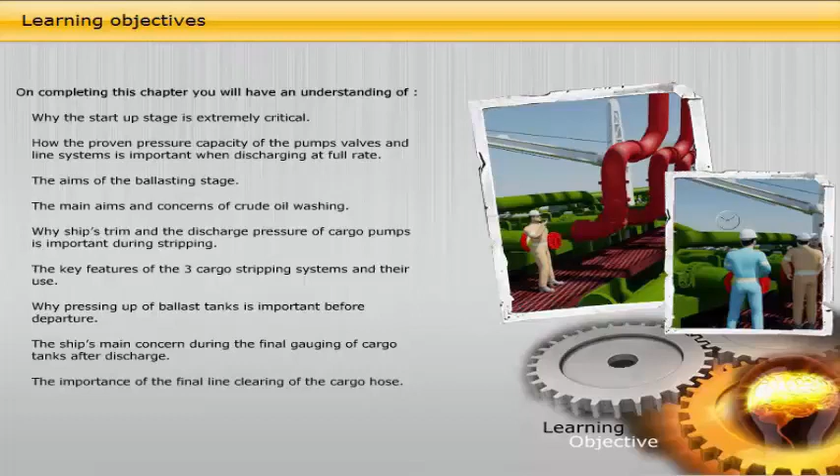why ship's trim and the discharge pressure of cargo pumps is important during stripping, the key features of the 3 cargo stripping systems and their use, why pressing up of ballast tanks is important before departure, the ship's main concern during the final gauging of cargo tanks after discharge, and the importance of the final line clearing of the cargo hose.

In the startup phase of the discharge operations, what extremely critical measures ensure that the tank's atmosphere does not go into negative pressure and that any leaks into dry pipes and valves are quickly detected? The discharge operation normally commences according to the following procedure. Formalities with port authorities and terminal, loading master, completed.

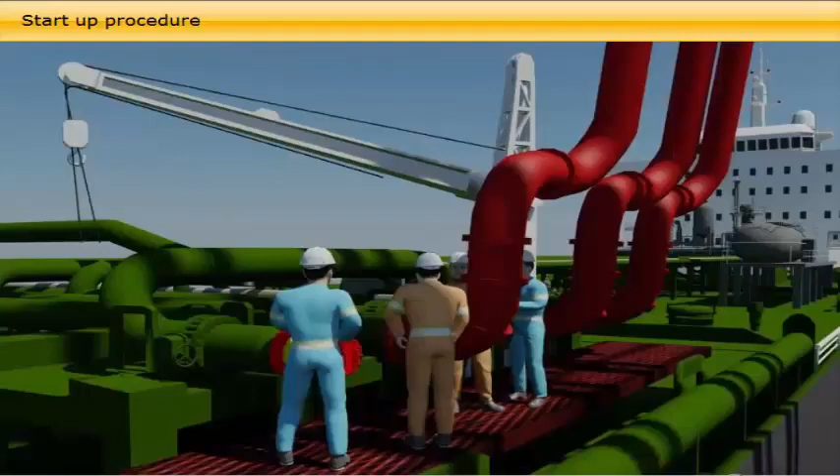Cargo hoses, arms, well connected. Cargo surveyors completed tank survey and calculation of the cargo arrival figures. Lining up of lines, valves and pumps to be used, both onshore and on board, under the supervision of the chief officer and loading master.

Line up and start inert gas plant, with the recirculation valve returning gas to the funnel until the pumps start running. When lining up is completed, and it is confirmed the inert gas plant is running satisfactorily, the chief officer reports to the loading master that the vessel is ready to start pumping.

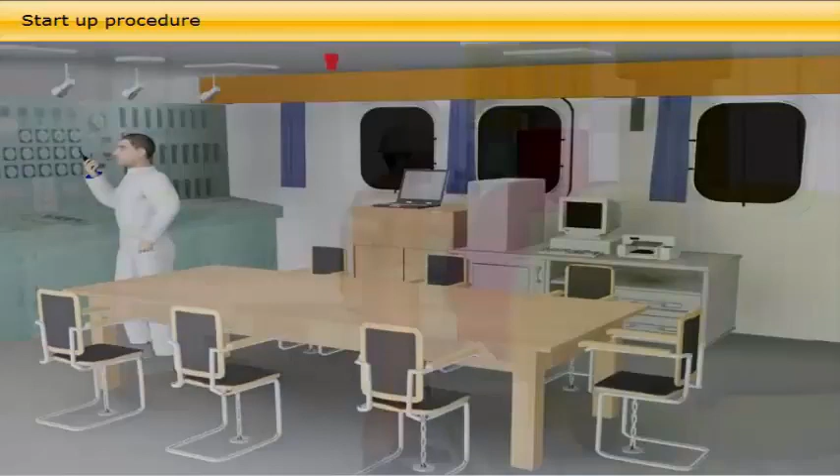The loading master orders the vessel's manifold valves to be opened according to the agreed discharge plan. When the manifold valves are confirmed open, the loading master orders discharge to commence at slow rate for line displacement. The cargo pump or pumps are now being started, either by the chief officer, pumpman or duty deck officer, in close cooperation with the duty engineer in the engine control room, at slow rate until correct flow is confirmed.

When the cargo pump or pumps are running, the inert gas is opened to the deck lines. The duty deck officer, pumpman and boatswain with deck crew must, during this sequence, check that the cargo oil is passing through the manifolds and check valves and lines in use to ensure that no malfunction or leaks occur when the cargo oil enters.

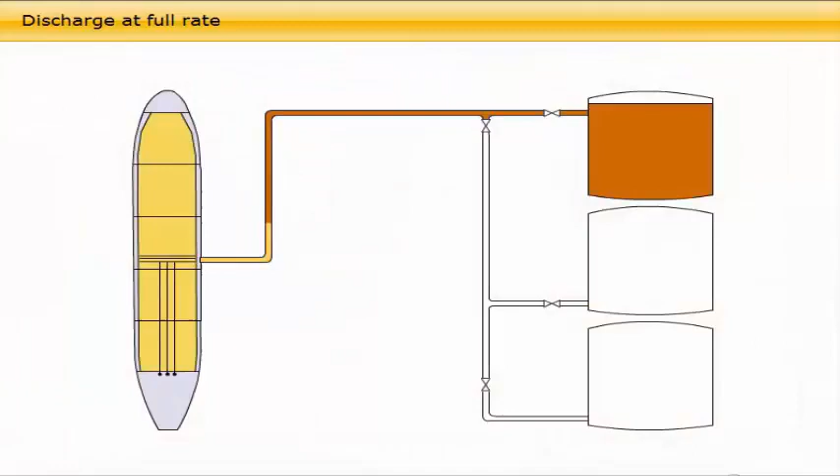Once all lines and valve settings have been proved to be free of leaks and the discharge operations have stabilized at a low rate, what is the main risk when pump revolutions are raised to the full discharge rate? When the loading master confirms that the oil flow is as planned and that the line displacement is completed, he instructs the vessel to slowly increase the discharge rate to the maximum as agreed upon in the discharge plan.

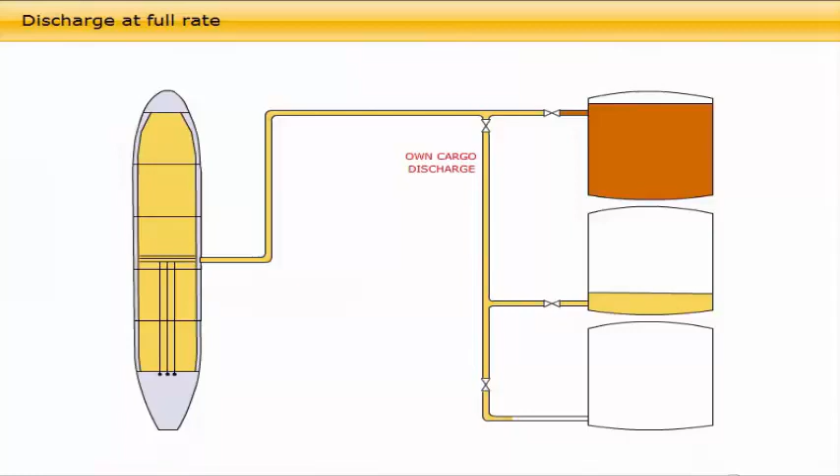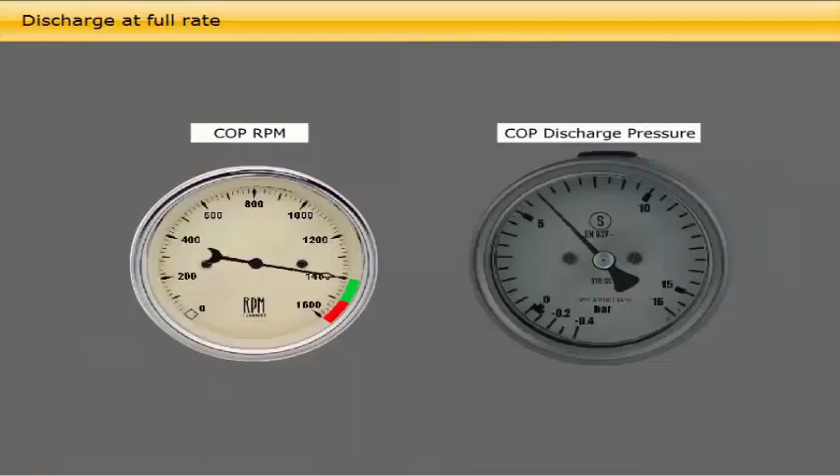In order to utilize the cargo pumps' capacity and operate them correctly, either in series or in parallel, it is important to understand the pumps' characteristics and know the shore lines and reception facility. At this stage, as the discharge has reached the maximum agreed capacity, it is important to check the pumps and cargo lines in order to discover any leaks caused by damaged flange gaskets or pipes holed due to corrosion or pitting. For further information on operation of cargo pumps, see CBT number 0078.

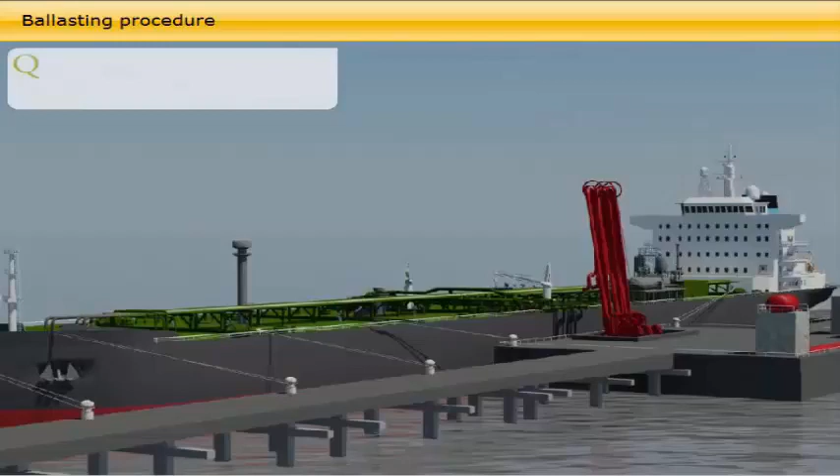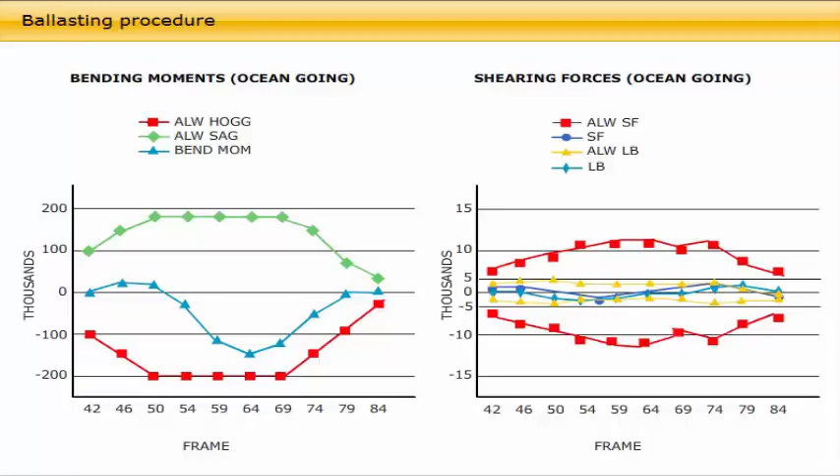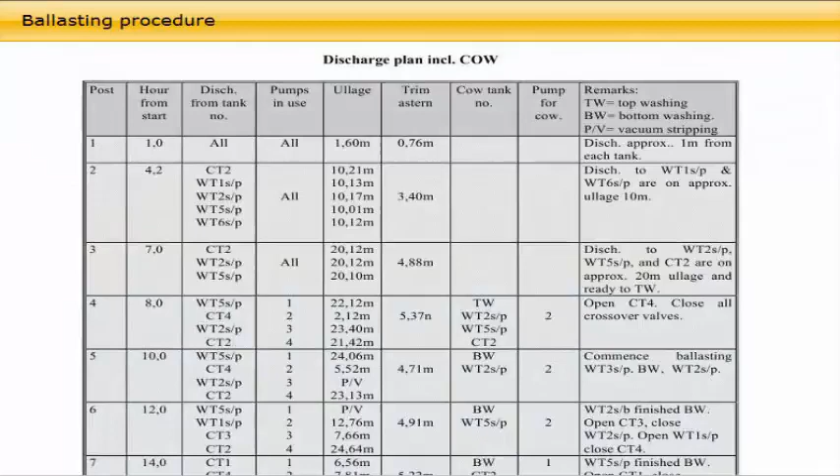What are the 4 main aims of taking in water ballast considered in the discharge plan, which decide when to start taking in ballast during discharging? When to start taking on ballast depends on the discharge rate, hull stress, air draft or freeboard or limitations on fixed discharge arms on the terminal, trim requirements for stripping, and also often a terminal requirement that the vessel may leave the berth immediately in an emergency. This was considered in the ship-shore meeting and will be found in the discharge plan.

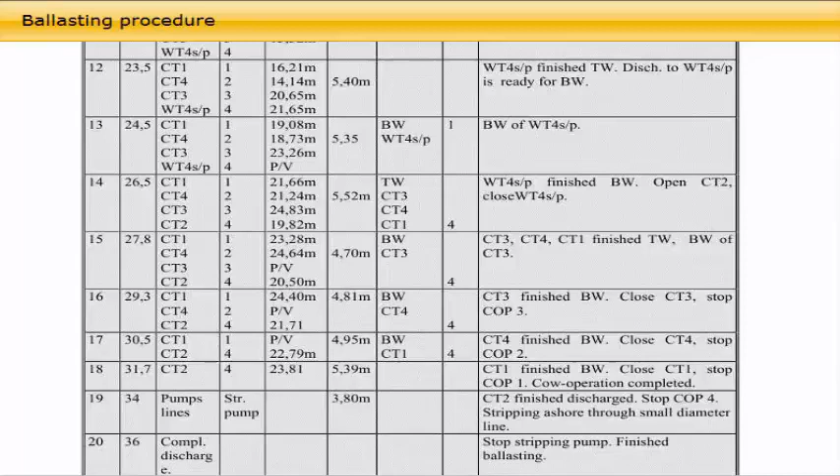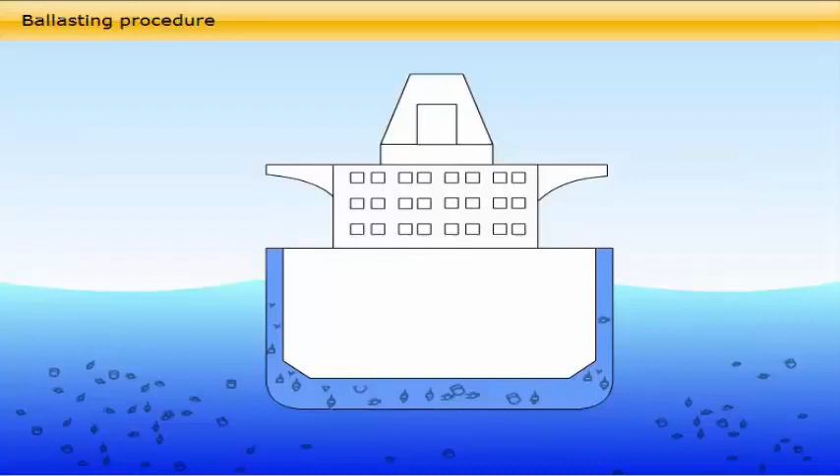In order to save fuel cost, taking on ballast by gravity in the first few hours of the ballasting operation may be considered. Ballast in the double-hull ballast tanks is completely segregated from the cargo tanks and piping, and is therefore ideal for adjusting the trim in connection with crude oil washing and final stripping of cargo tanks. All ballast handling is required to be recorded in the vessel's Ballast Water Management Plan, according to IMO Resolution A868-20 Convention adopted February 2004.

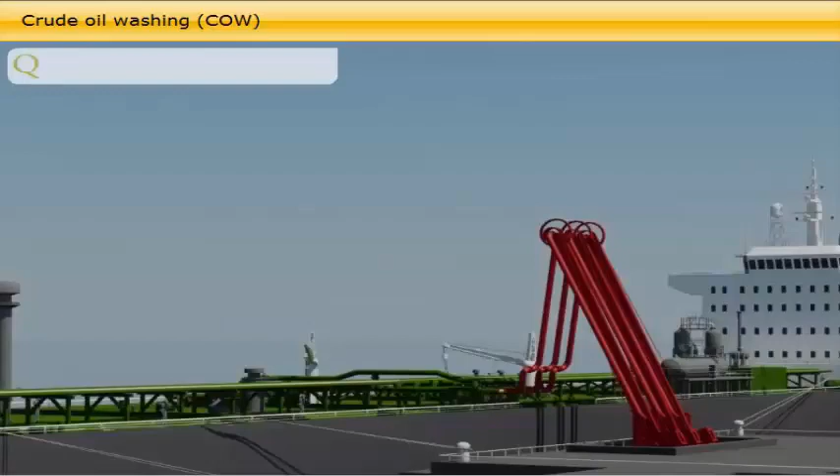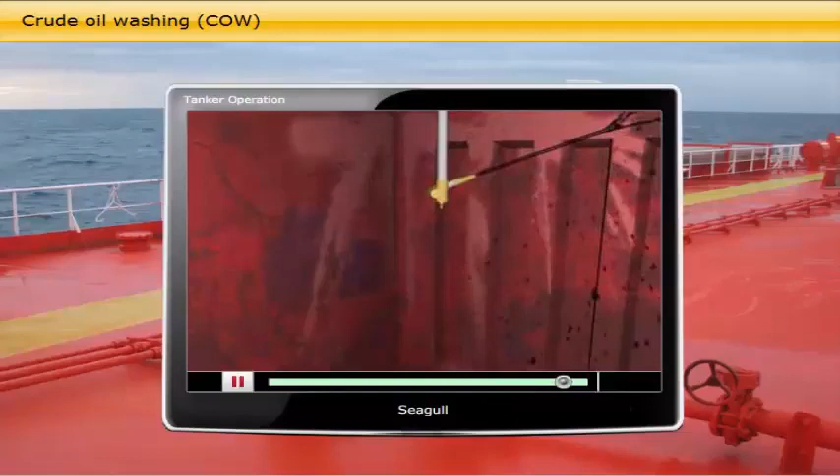What are the 6 main aims and concerns in a crude oil washing operation? The crude oil washing operation is a demanding task that requires full attention from all duty deck personnel. The terminal requires to be informed when crude oil washing starts and to be updated during the operation and when completed. Before departure on a ballast voyage, after the complete discharge of cargo, sufficient tanks shall have been crude oil washed in accordance with the procedures specified in the Crude Oil Washing Operations and Equipment Manual.

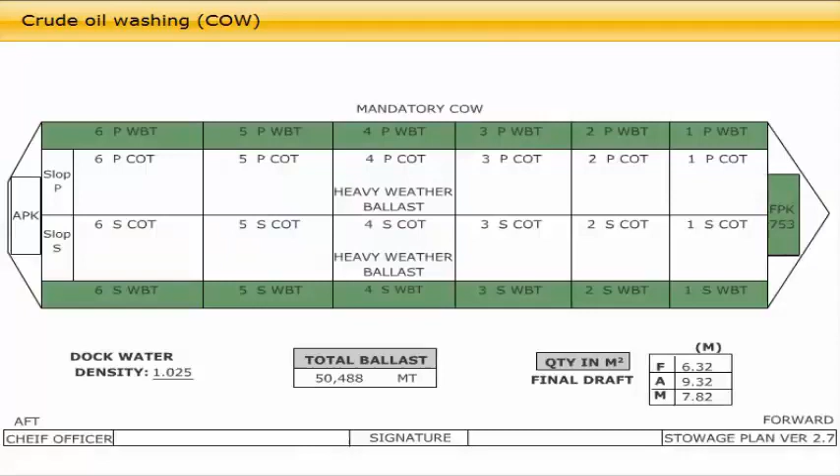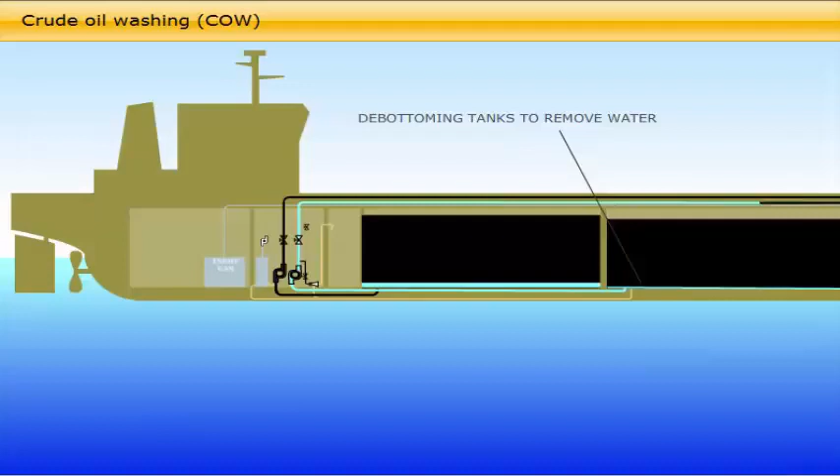Designated heavy weather ballast tank, cleaned to take on ballast in bad weather. For the new double-hull tankers, the required number of tanks to be crude oil washed every discharge is approximately 1/4 of the total number of tanks, including the tanks which are dedicated to take on heavy weather ballast. The remaining tanks are to be crude oil washed on a rotation basis. Sludge control routines. For sludge control purposes, no tank needs to be crude oil washed more than once in every 4 months. Static electricity.

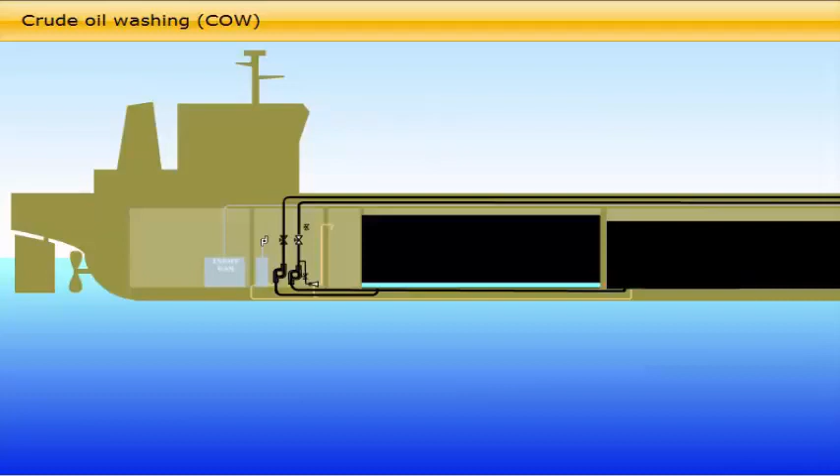To avoid excessive electrostatic generation in the washing process due to the presence of water in the crude oil washing fluid, the contents of any tank to be used as a source of crude oil washing fluid must first be discharged by at least 1 meter before being so used. Any tank used as a slop tank on the previous ballast voyage shall be completely discharged and refilled with dry crude oil if that tank is to be used as a source of washing fluid.

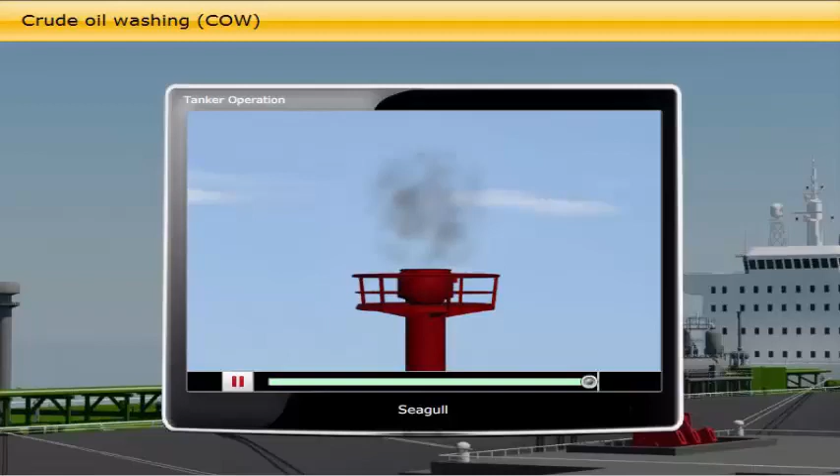Vapor generation and VOC emission. In order to minimize the vaporization of volatile organic compounds while crude oil washing, closed-cycle washing from a dedicated slop tank, reusing a fixed quantity of oil, is preferable to bleeding off fresh crude oil from a tank during its discharge.

Inert gas pressure and oxygen content. Before starting crude oil washing, it is required to measure the tank atmosphere to ensure that oxygen content does not exceed 8%, and that the oxygen content in the inert gas supply does not exceed 5%. Throughout the entire discharge and crude oil washing operation, it is important to monitor the inert gas pressure. If the inert gas system fails, the discharge and crude oil washing operation must be stopped and cannot be resumed until the inert gas system is working satisfactorily again.

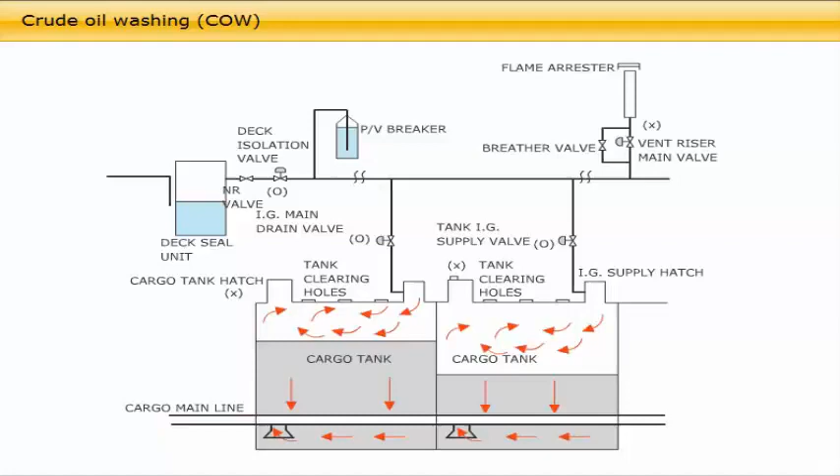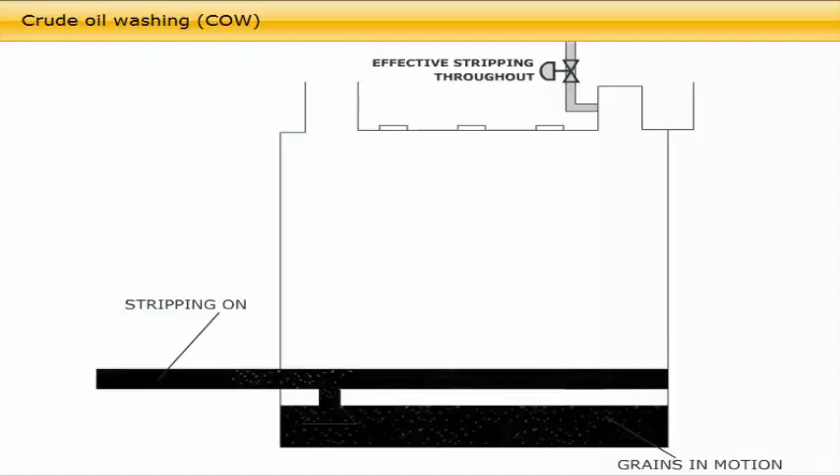All crude oil washing machines need to be regularly function checked during the operation, and necessary adjustment of the drive unit program for correct washing pattern and cycles are to be carried out according to the discharge plan. Effective stripping throughout: the sludge sediment at the bottom is effectively removed only if it is stripped out immediately and not allowed to accumulate.

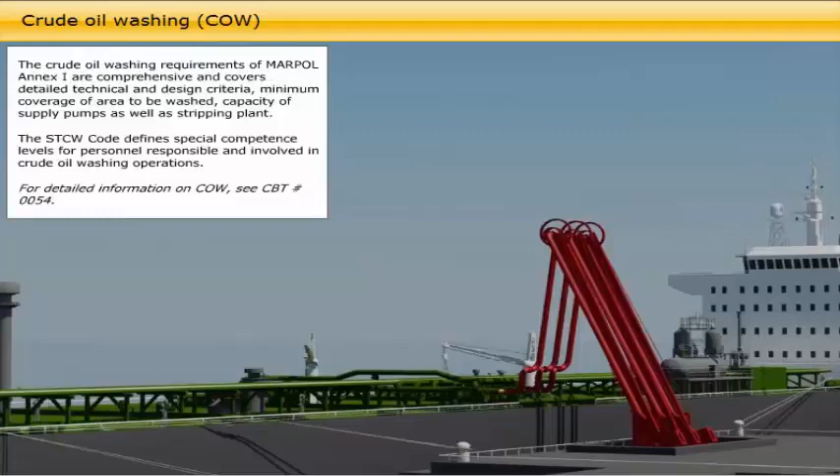The crude oil washing requirements of MARPOL Annex 1 are comprehensive and cover detailed technical and design criteria, minimum coverage of area to be washed, capacity of supply pumps, as well as stripping plant. The STCW code defines special competence levels for personnel responsible and involved in crude oil washing operations. For detailed information on crude oil washing, see CBT number 0054.

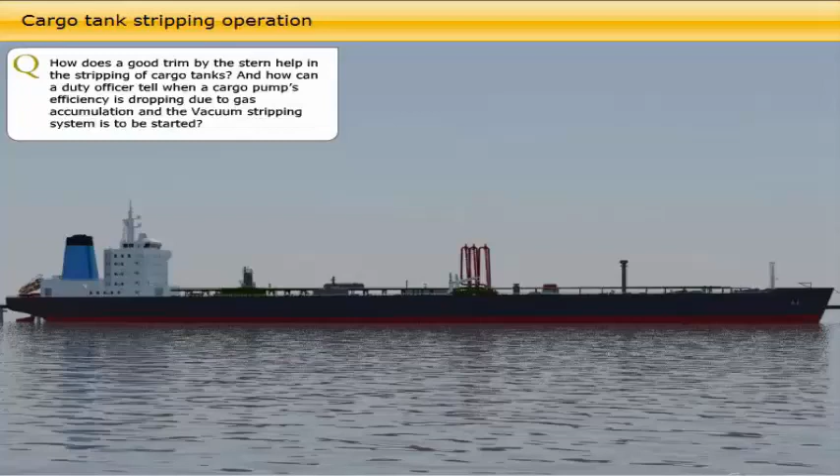How does a good trim by the stern help in the stripping of cargo tanks? And how can a duty officer tell when a cargo pump's efficiency is dropping due to gas accumulation and the vacuum stripping system is to be started?

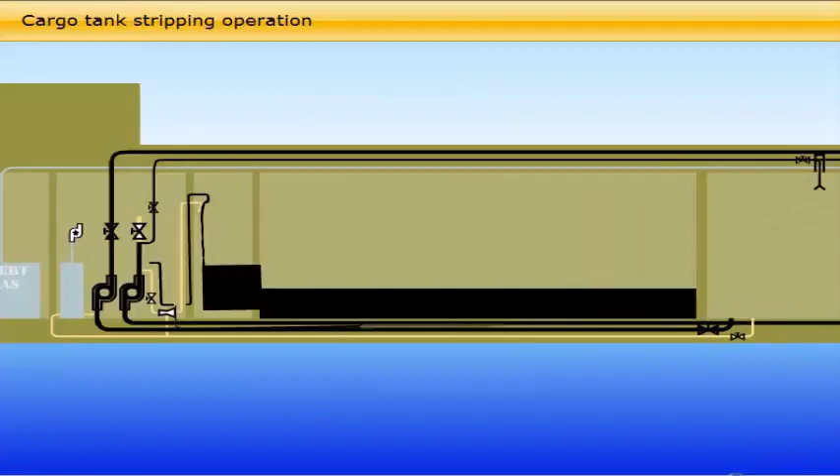The stripping, or final draining of the cargo tanks, is an important phase of the discharge operation. In order to achieve a satisfactory out-turn of the cargo, it is necessary to document that the remaining quantity in the cargo tanks, lines and pumps are as close to zero as possible. Prior to reaching the stripping level in the cargo tanks, the vessel should be trimmed to a certain trim by the stern in order to obtain a natural free liquid flow to the suction area in the after part of the tanks.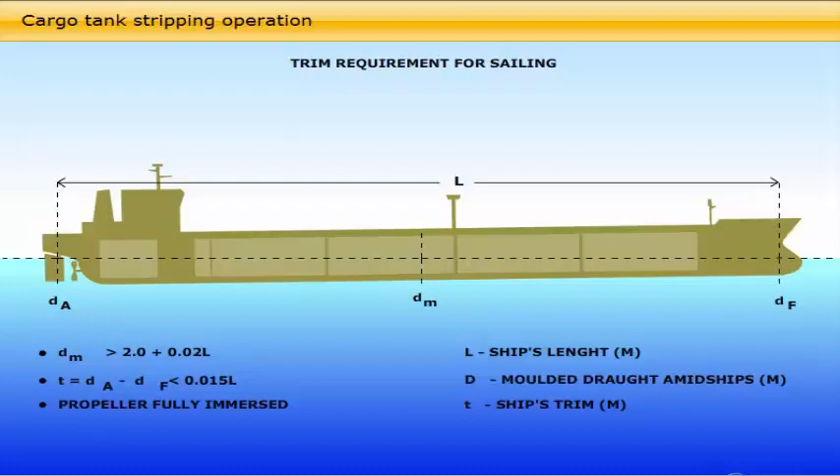By observing the cargo pump pressure gauges, the duty deck officer or pumpman operating the cargo pump console will get an indication by falling pumping pressure that the pump or pumps' efficiency are dropping because of gas accumulation. At this stage, it is necessary to assist the pump or pumps by starting the vacuum strip system.

What are the three main cargo stripping systems in use on crude oil tankers? On crude oil carriers, there are three different draining and stripping systems fitted: the vacuum strip system, the stripping eductor, and the stripping pump for line stripping through the small diameter line, or MARPOL line. Click on the buttons to learn more.

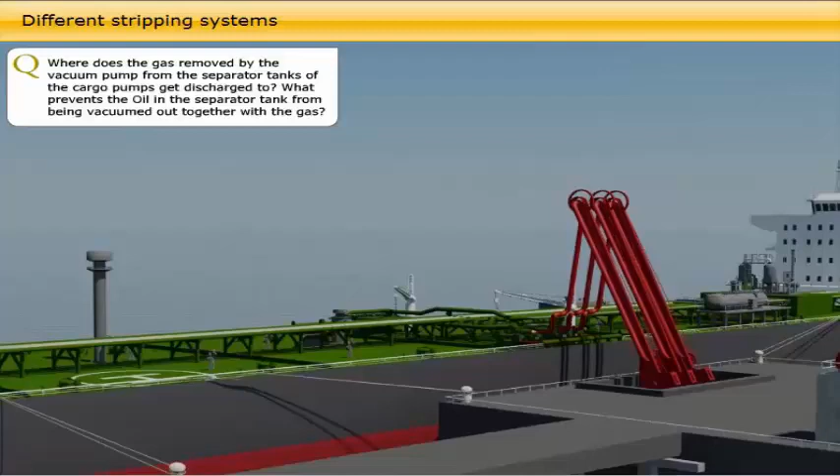Vacuum stripping system. Where does the gas removed by the vacuum pump from the separator tanks of the cargo pumps get discharged to? What prevents the oil in the separator tank from being vacuumed out together with the gas?

The vacuum strip composition is a system which is fitted on the suction line and close to each cargo pump. The system consists of a separator tank forming part of the suction line to each cargo pump. The purpose of this separator tank is to support the cargo pump with liquid. The separator tank, one for each cargo pump, has a pipe connection to a vacuum tank located at a higher level in the pump room. Further, the vacuum tank is connected to a vacuum pump.

Briefly explained, the liquid level inside the separator tank will fall when the liquid level in the cargo tank becomes lower than the height of the separator tank, and the void space above the liquid inside the separator tank will increase. At this stage, falling pump pressure should be observed, and the vacuum system started.

At a fixed liquid level in the separator tank, a signal is given to the vacuum pump to start, and vacuum is created in the vacuum tank. The valve opens between the vacuum tank and the top of the separator tank, and by that, the vacuum effect in the void space on top of the liquid level inside the separator tank will lift the liquid level and assist the cargo pump. The gas accumulation on top of the liquid inside the separator tank will at the same time be evacuated by a separate line into the slop tank.

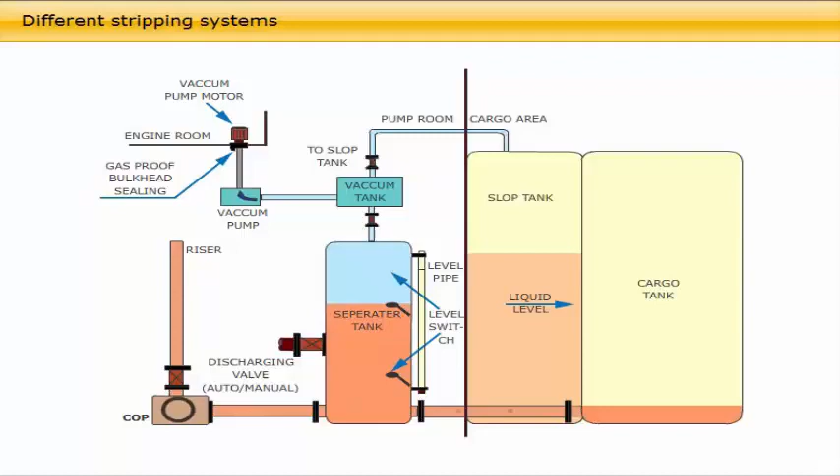As the oil level in the separator rises to a cut-off point, a signal shuts off the valve connecting to the vacuum tank, and liquid cargo is prevented from being vacuumed up. Assisted by the vacuum strip system, the cargo tanks can be satisfactorily emptied by the cargo pumps.

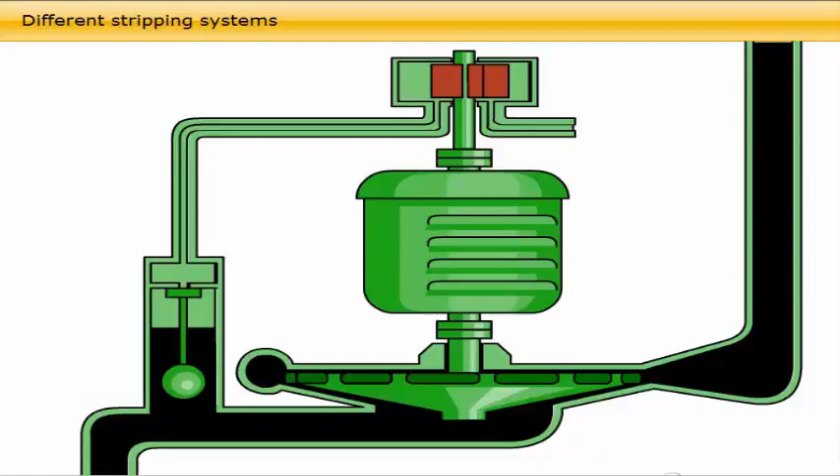In addition, the suction area for the stripping suction bell mouth on the double-hull tankers is formed as a sump called the suction well, which allows the suction bell mouth to be fixed inside a restricted area and lower than the tank bottom. For further details regarding vacuum strip systems, see separate documentation.

The stripping eductor.

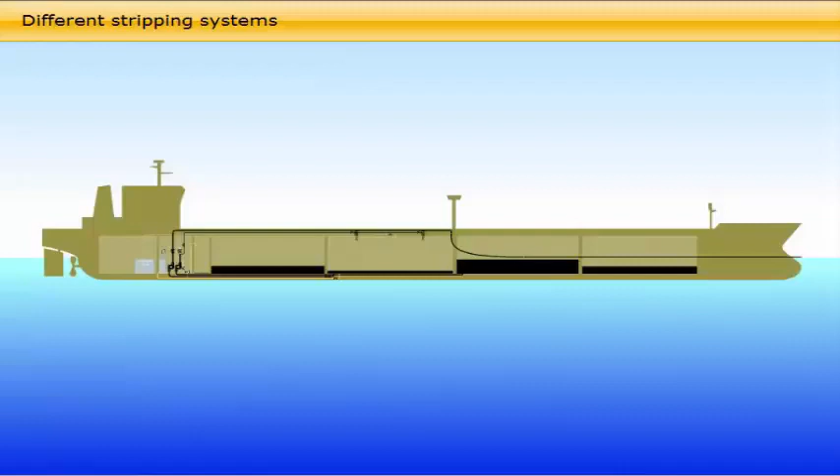Why is the stripping eductor specially preferred for draining tanks during crude oil washing? During crude oil washing, the washing fluid is discharged to shore with the bulk cargo. In the final stage of crude oil washing, bottom crude oil washing for removal of sludge and sediments, the stripping eductor is used, as well as for final draining of all cargo tank bottoms and lines.

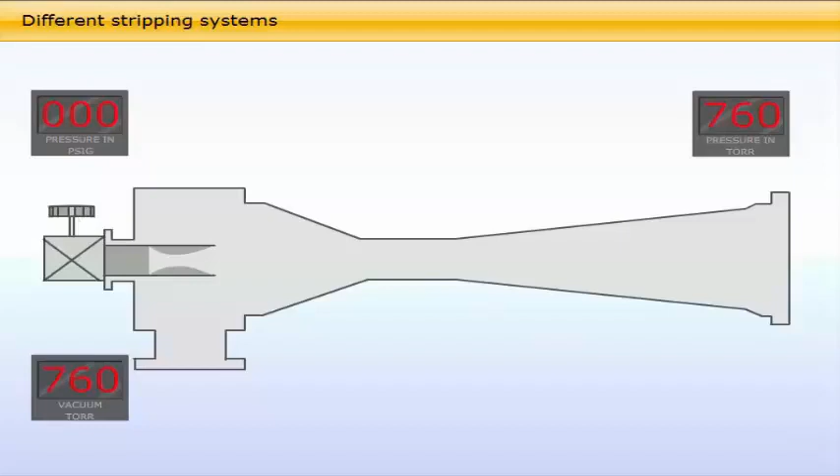The stripping eductor is driven by either a cargo pump or a separate crude oil washing pump. The driving fluid and the drainage from the tanks are delivered into the primary slop tank, which will be the last tank to discharge with one cargo pump. The stripping eductor is designed to a capacity 1.25 times higher than the combined throughput of all crude oil washing machines designed to be used simultaneously. That is why it is preferred for stripping during crude oil washing.

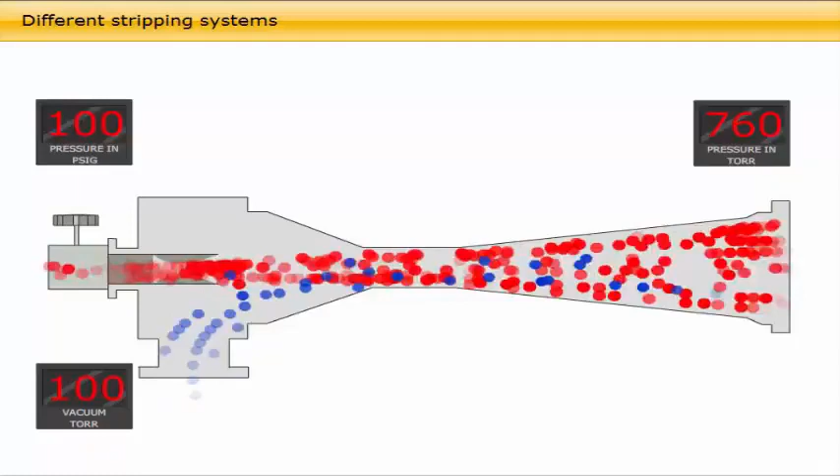Another reason is that it creates a vacuum continuously for fluid as well as gas directly in the cargo tank, if the tank becomes dry temporarily and gas pockets form in the suction pipe. A stripping pump would stop and start, and a vacuum strip pump would need a good quantity of oil in the pipe. When the crude oil washing is completed, the after crude oil washing checklist is to be completed.

When finally stripping the main cargo lines, why should inert gas be allowed to enter from a cargo tank at the highest point of the manifold?

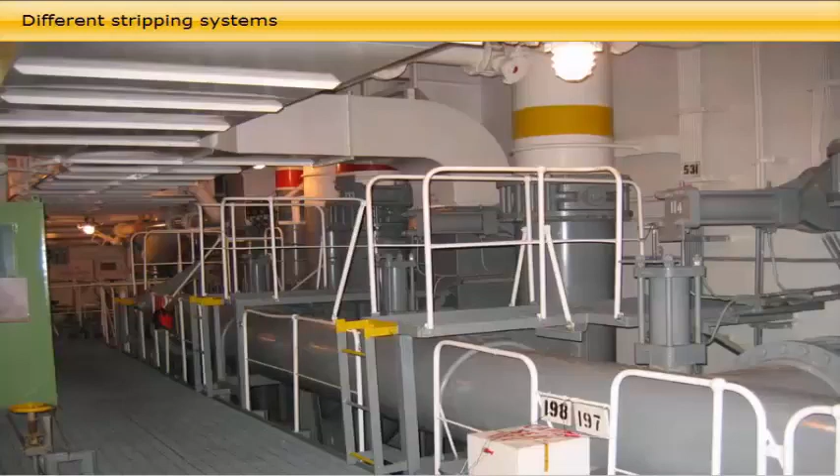When the slop tanks are empty, the bulk discharge is completed and the manifold valves are to be closed. The final draining of the vessel's cargo pumps and lines in the pump room and on deck shall be carried out by means of a stripping pump, normally a steam-driven pump, which can deliver the remaining oil to shore through a small diameter line, also called a marpol line.

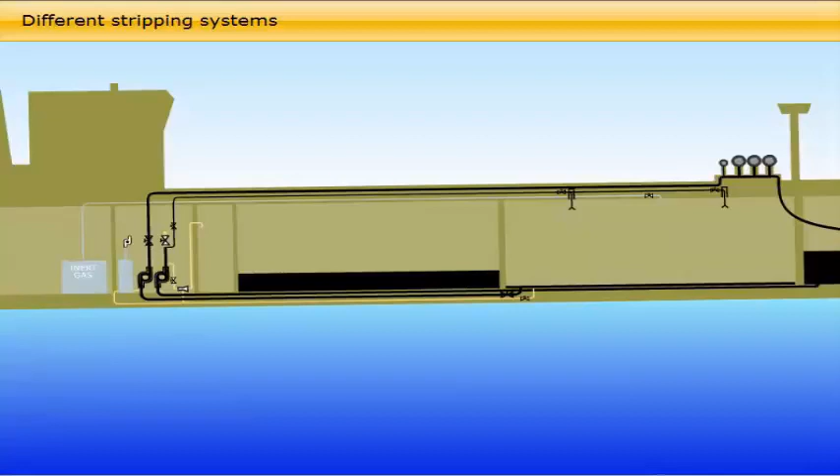This line is connected to one of the manifold lines, outside of the manifold gate valve, in order to enable direct discharge to shore after the manifold valves have been closed. When the final draining through the small diameter line is completed and its valve at the manifold is closed, the remainder in the same line is dropped via a small branch pipe to the nearest cargo tank. The discharging operation is completed.

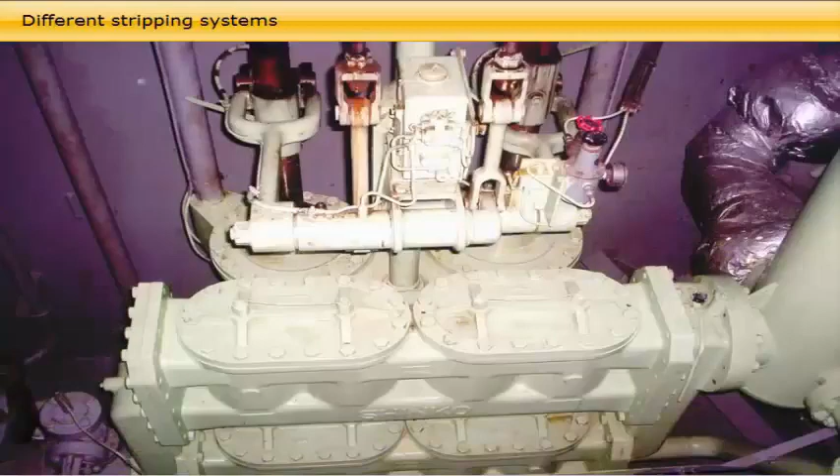When draining the main cargo lines, it is important to break the vacuum caused at the top of the manifold by the stripping pump taking suction at the lowest point of the pipelines. For this purpose, a 2-inch line with a gooseneck is provided from the highest point of the manifold to the inert atmosphere at the top of a cargo tank. The valve in the line should be opened to break the vacuum during final line stripping.

Give two reasons why ballast tanks should be filled to the maximum level possible before sailing out.

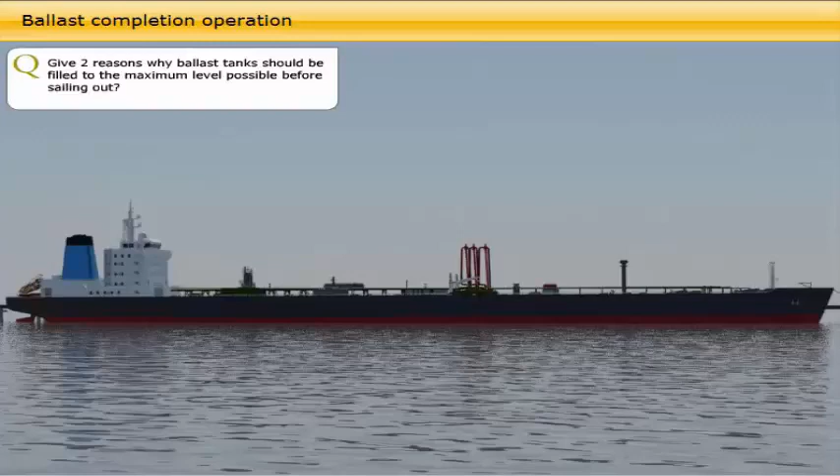The forward ballast tanks will normally remain to be topped up when the discharge operation is completed, as these tanks may have been used for trimming the vessel by stern for cargo stripping. The ballast tanks should always be filled to the maximum allowance in order to minimize the void space between the ballast water and deck. From experience, it is well known that this area in the ballast tanks is exposed to air and splash of seawater, which results in corrosion. This also helps to minimize free surface effects due to slack ballast tanks.

When the last ballast tank is topped up, the vessel should be in a seaworthy condition, as prescribed by the IMO or SOLAS regulations. The ballast operation is now to be recorded in the Ballast Water Management Plan.

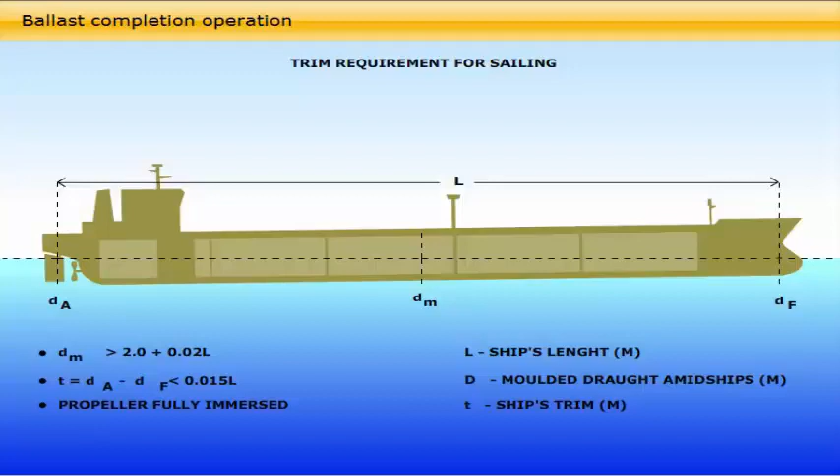What is the ship's major commercial concern when the tank is being finally surveyed on completion of discharge?

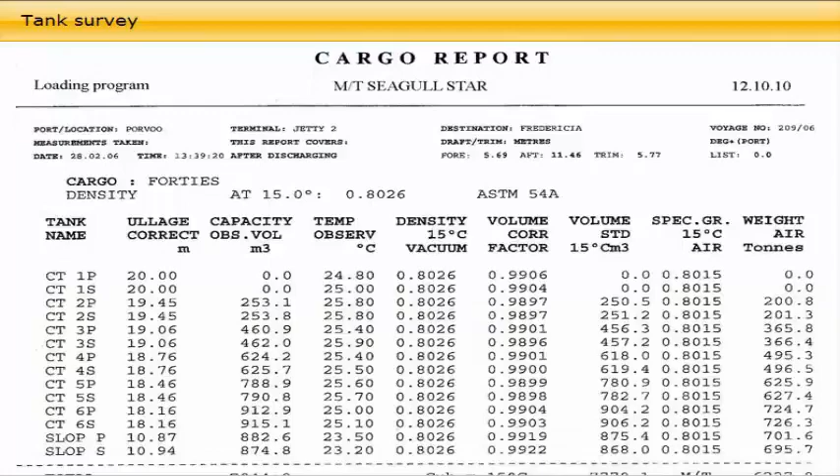As soon as the discharge is completed, the cargo surveyors start surveying the cargo tanks together with the duty deck officer and deck crew. This survey consists of dipping the tanks in order to confirm that all cargo is discharged. All tank dipping must be through dipping pipes or hatches with vapor locks. After completion of the tank survey, surveyors calculate the remaining on-board quantity, and all documentation is signed by the chief officer and cargo surveyor.

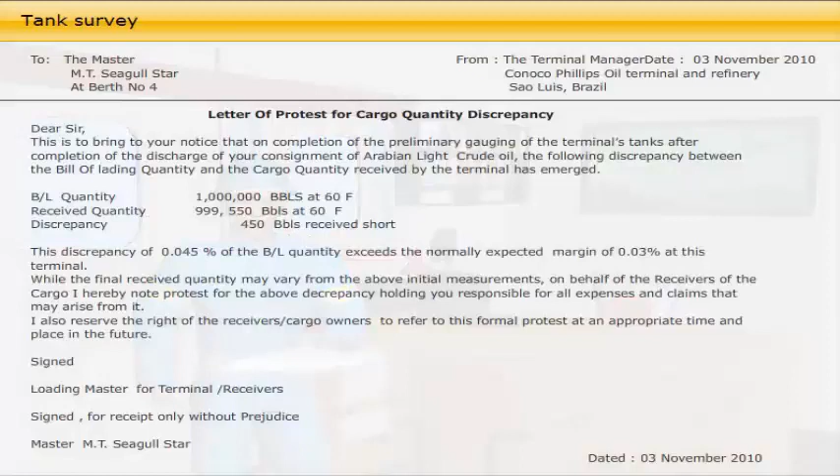If an unacceptable quantity of the cargo oil remains on board, the cargo surveyor will issue a letter of protest on behalf of the cargo receivers and charterers, which is to be signed by the master.

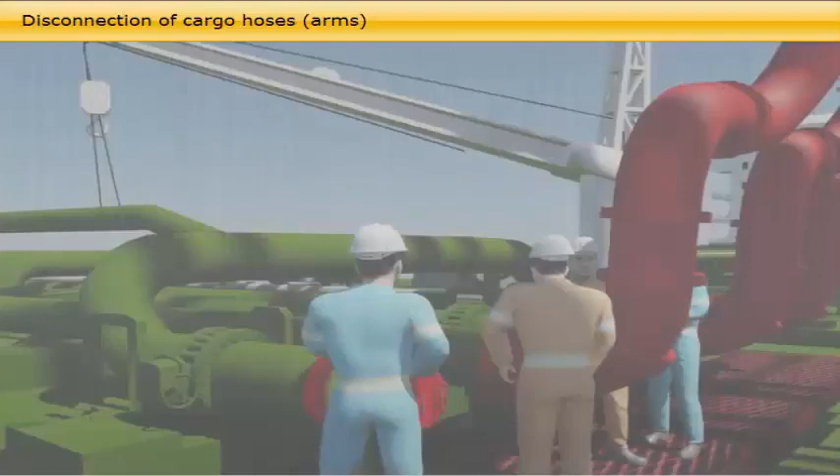What is the main environmental concern during disconnection of hoses, and what action is to be ensured to mitigate it?

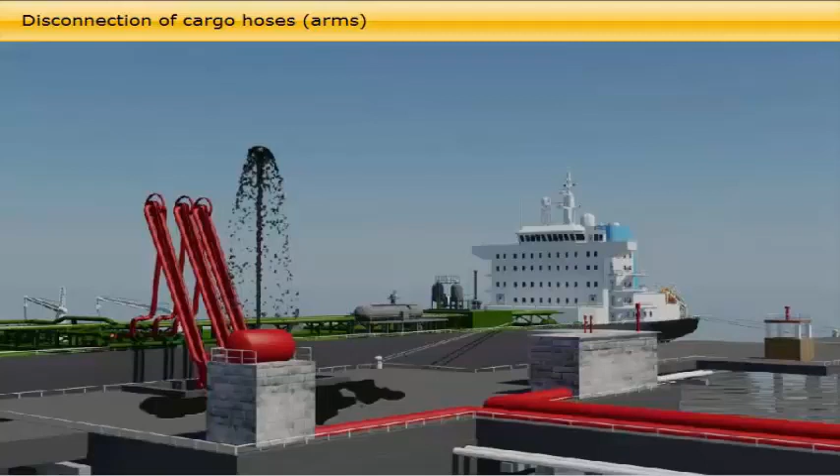As soon as the final stripping through the small diameter line is completed, the terminal staff will drain the cargo hoses or arms, and then the disconnection will be initiated. If the draining or blowing with nitrogen is not effective, there is an immediate danger of an oil spill into the drip tray and outside it.

To prevent small quantities of oil dirtying the drip tray and creating a pollution hazard from weather at sea, empty, half-cut drums should be placed under the flange when breaking it. The disconnection should be supervised by the duty deck officer until all hoses or arms are off and the manifold blanks fitted. If the vessel has discharged via an SPM buoy, the disconnection operation is more demanding and, as for berthing, requires experienced hands.